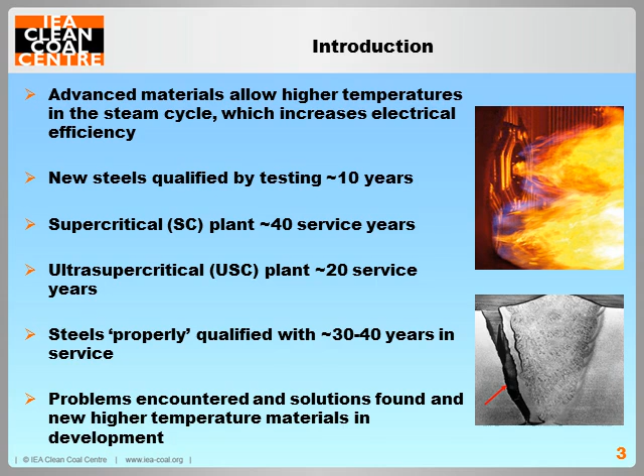There's also constant stress, which is caused by high pressures and high physical loads. This results in cracks on the inside of the material, and this is known as creep damage. There's also cyclic stresses, which is induced by fluctuating temperatures and pressures. This results in cracks on the outside of materials, and this is called fatigue damage.

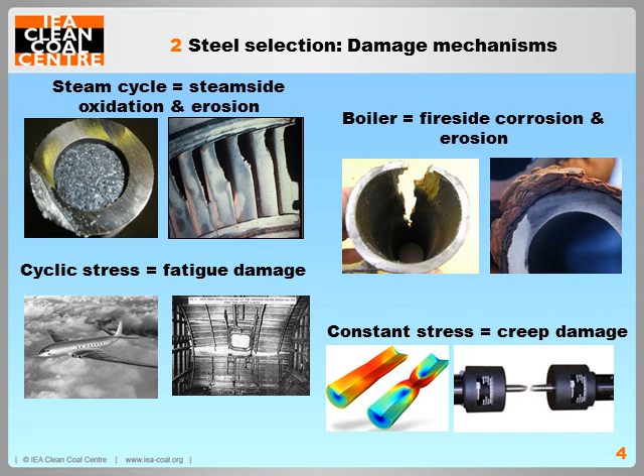So, steels are made up of loads of tiny crystals in the nanometer scale. These steels can be strengthened with three main techniques. The first is solid solution strengthening, which is where small amounts of different sized alloying elements are diffused into the metal to prevent movement.

The second is dislocation strengthening. This is where the material is deformed plastically at low temperature. This tangles the crystals in the material, which prolongs crystal life. And finally, there is precipitation strengthening. This is where the amount of alloying with at least two other elements is increased so that they create a second phase known as precipitates. These precipitates prevent the movement and recovery of crystals.

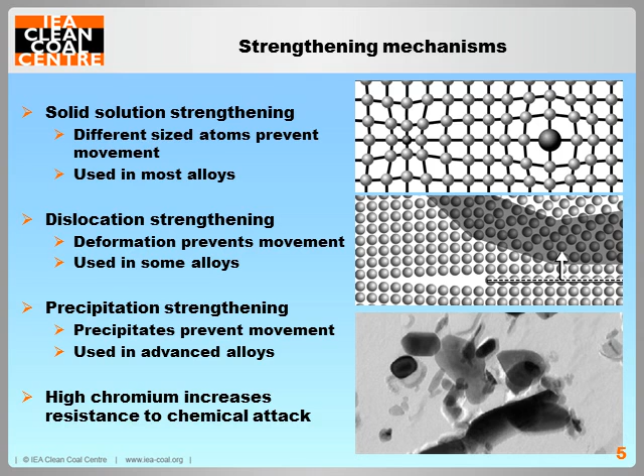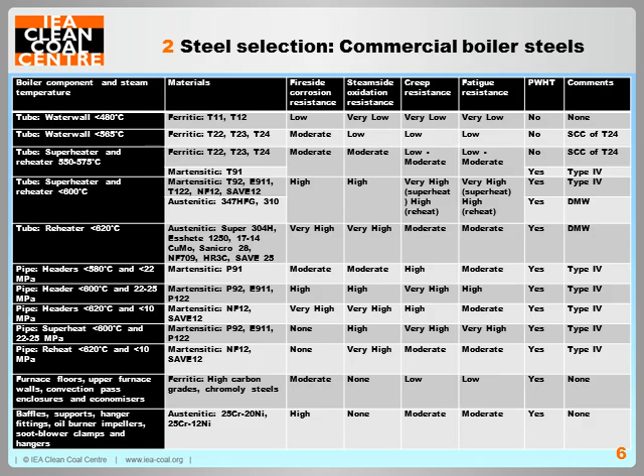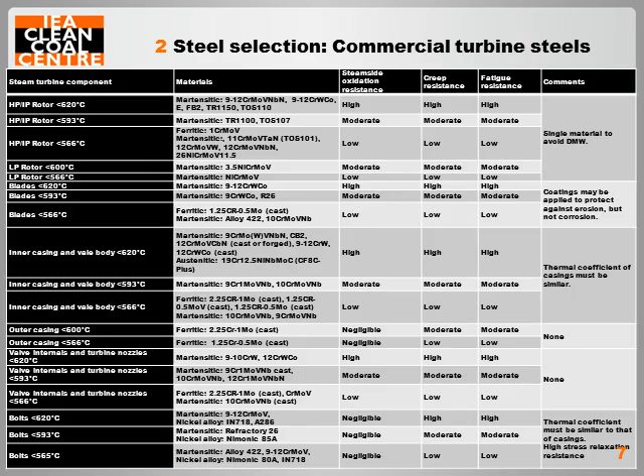This is the same table for the steam turbine component. I'm not expecting you to remember these tables. I've put them here purely to demonstrate the complexity involved in power plant materials. They are in the report for analysis.

So, ferritic steels, they have a low amount of alloying and are strengthened with solid solution strengthening and dislocation strengthening. Ferritic steels are easy to manufacture and they have a good performance all round up to 565 degrees Celsius, where they are then limited by steam side oxidation. They are the only steel that does not require expensive and time-consuming post-weld heat treatment.

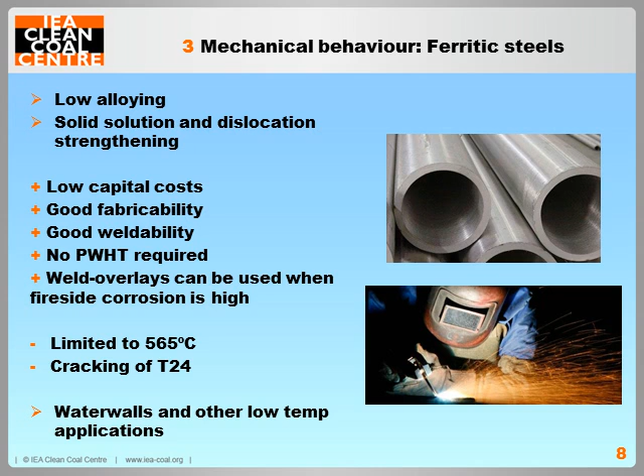Ferritic steels made up most of the components in subcritical pulverised coal-fired power plant, and the chrome alloy ferritic steels such as T22 are used in water walls and other low-temperature applications in supercritical pulverised coal-fired power plant. The installation of low-NOx burners in boilers has caused excessive corrosion of ferritic steels near the burners due to differences in combustion stoichiometry. This problem has been solved with protective high chromium weld overlays.

T24 is a new ferritic steel developed in Europe for ultra-supercritical power plant. Shortly after first commissioning in 2010, multiple cracks developed in T24. Evaluation found the cracking mechanism to be stress corrosion cracking. Preventative measures such as additional heat treatment during the welding procedure, adjusted water chemistry, adaptive chemical cleaning process and startup procedure were introduced in 2011, and to date no stress corrosion cracking has been detected.

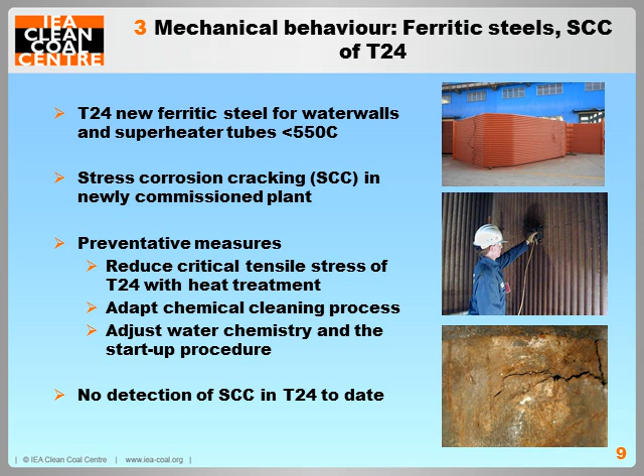Martensitic steels allowed progression to supercritical steam conditions. High alloying of chromium, molybdenum, nitrogen, niobium, vanadium, and others achieve a significant amount of precipitation strengthening. Generally, the 9 to 12% chromium martensitic steels have high creep and fatigue resistance, a low coefficient of thermal expansion, a high thermal conductivity, and good fabricability.

9 to 12% chromium martensitic steels can operate up to 600 degrees Celsius at high pressures of up to 25 megapascals, but they are limited by the resistance to steam side oxidation. 11 to 12% chromium martensitic steels can operate up to 620 degrees Celsius at low pressures of less than 10 megapascals, but are limited by their strength.

Martensitic steels do, however, require expensive and time-consuming post-weld heat treatment. They suffer from long-term weakening mechanisms and they are susceptible to cracking.

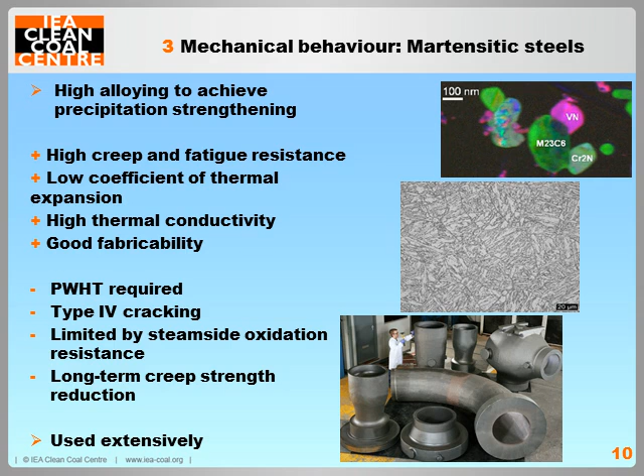Evaluation has shown the cause to be insufficient alloying or incorrect temperature profiles during the fabrication of the parent material, or insufficient alloying or incorrect temperature profiles of the weld material and the heat treatment procedures during the welding procedure.

New components have reduced the risk of type 4 cracking through component design, which minimises stress in the weld, and so that the welding procedure and post-weld heat treatment procedures are easier to carry out correctly. Also, it has to be ensured that the parent material has the correct amount of alloying and is fabricated correctly.

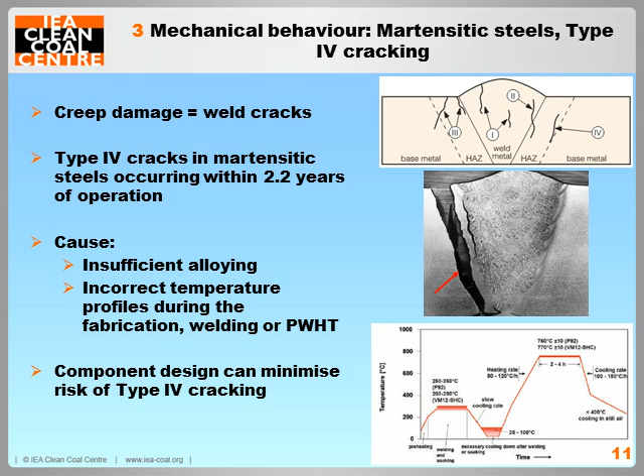So martensitic steels suffer from long-term weakening mechanisms. With all chromium martensitic steels with 9 to 12% chromium, the tungsten and molybdenum will precipitate out as large and coarse Laves phase, which consume all the small strengthening precipitates. Due to Laves phase weakening, P92 has been found to have long-term creep strength not much greater than P91.

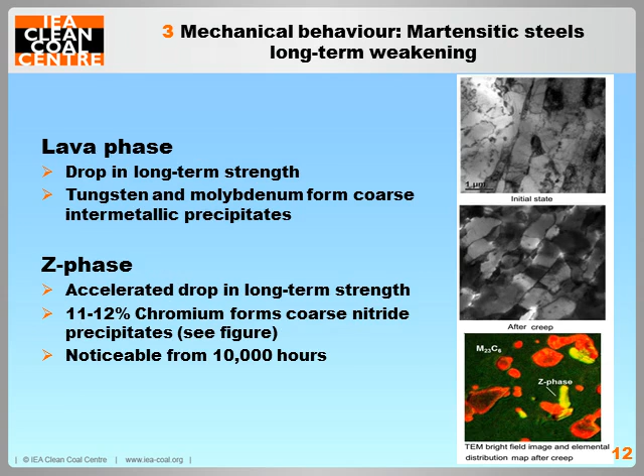Higher chromium martensitic steels with 11 to 12% chromium have an accelerated drop in long-term creep resistance, which is more than what can be explained by Laves phase alone. The increased chromium levels cause precipitation of coarse nitrides known as Z phase. So the combination of Laves phase and Z phase means that higher chromium martensitic steels are weaker than lower chromium martensitic steels.

Cyclic operation has resulted in higher fatigue damage of high temperature components, but also creep fatigue damage. Creep fatigue damage is where creep damage and fatigue damage interact synergistically, which can result in failure sooner than either creep or fatigue damage alone. Creep fatigue damage has been a significant cause of failures in T91. It is important to note that not all material codes currently assess creep fatigue damage.

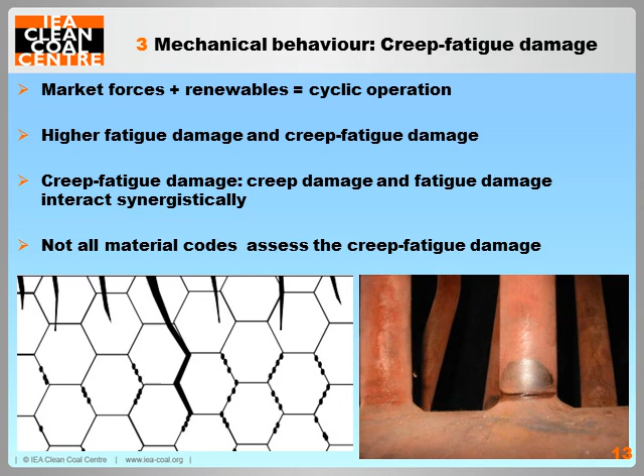Austenitic steels are used in superheaters and reheaters of ultra-supercritical power plant. They're seen every day as stainless steels. High alloying with elements such as chromium and nickel achieve high solid solution strengthening and high precipitation strengthening. They have excellent performance at around 665 degrees Celsius, but they have a high coefficient of thermal expansion, which results in cracking when used in thick section components. Austenitic steels are therefore limited to thin section components.

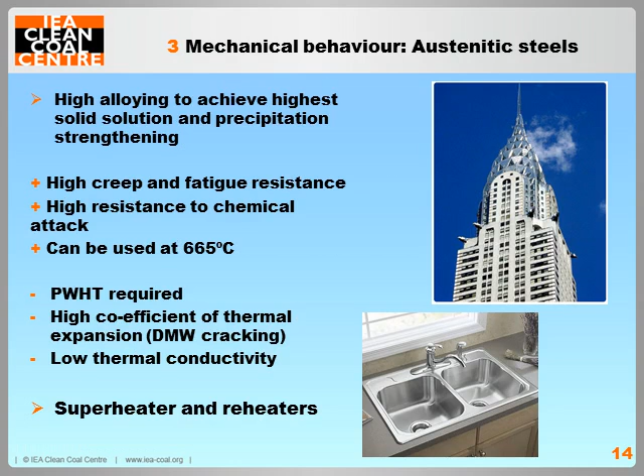Dissimilar metal welds are welds between different types of materials. There is a high risk of cracking at these welds due to differences in material properties. One issue is different carbon concentrations cause carbon to diffuse from areas of high to low concentration, altering material properties such that strength decreases. They also expand at different rates, and localized oxidation forms, which is an ideal place for crack initiation. So cyclic operation of older plants results in failure of dissimilar metal welds.

New components have reduced the risk of dissimilar metal weld cracks through thermal coefficient matching and component design to minimize the stress on the weld.

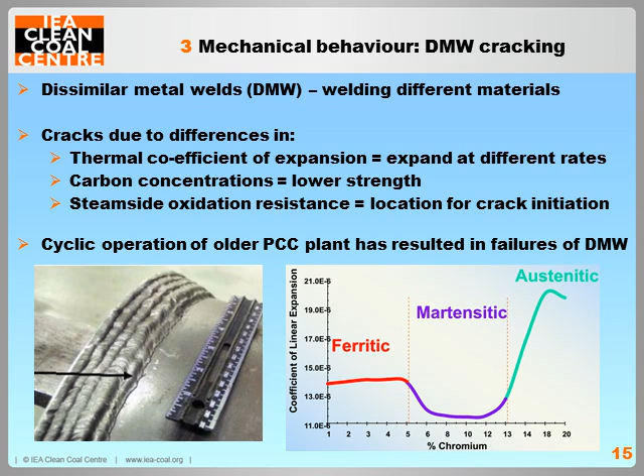Excessive slagging and fouling will increase creep damage as well as reduce boiler performance. Soot blowers use compressed air, steam, or water to knock off deposits. New intelligent soot blowers are retractable, can vary the injection pressure, and use heat transfers to determine when cleaning is required. This combination allows for maximum cleaning, minimum resource usage, and minimum material damage.

Typical payback periods for some plants can be less than one year, and this online cleaning technique can also eliminate the need for offline boiler cleaning for up to 20 years.

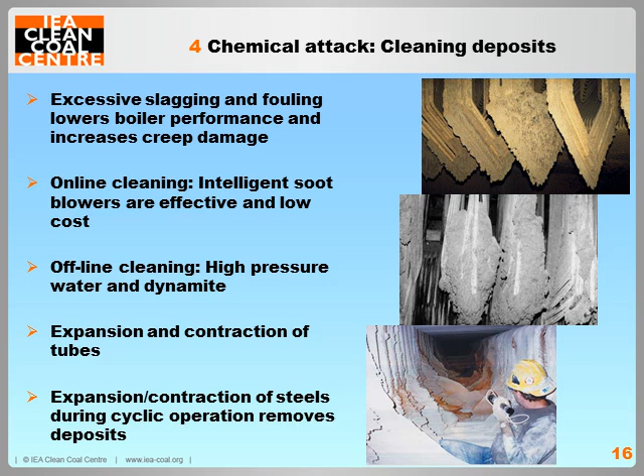An unforeseen advantage of cyclic operation is the fact that cold starts expand boiler tubes by up to half a metre. This can effectively dislodge the deposits, which again reduces the need for offline cleaning.

Feed water for the steam cycle can be treated in two main ways: firstly, deoxygenated feed water, and secondly, oxygenated feed water. Deoxygenated feed water results in no steam side oxidation, but the treatment method can dissolve iron in some situations. This is known as flow accelerated corrosion and causes a thinning of the pipes. Flow accelerated corrosion has resulted in numerous failures and fatalities historically. Despite this, deoxygenated feed water is still used in over 70% of fossil fuel power plants today.

The alternative is oxygenated feed water treatment, which creates a protective oxide layer on the inside of the material surface to prevent further steam side oxidation and flow accelerated corrosion. Another way to protect against flow accelerated corrosion is with the use of higher chromium ferritic steels.

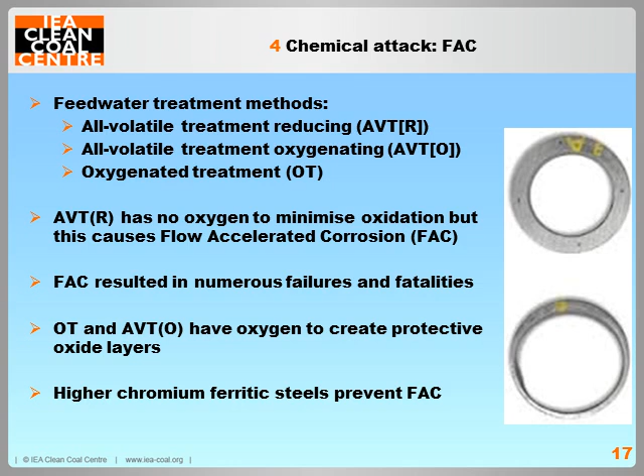It can be economically favourable to repair or replace components before failure, which could lead to catastrophic failure. To do this, the steel lifetime accounting for cyclic operation is required. This corrected steel lifetime can be accurately measured with modern software packages and material examination tools. This technique is known as condition monitoring.

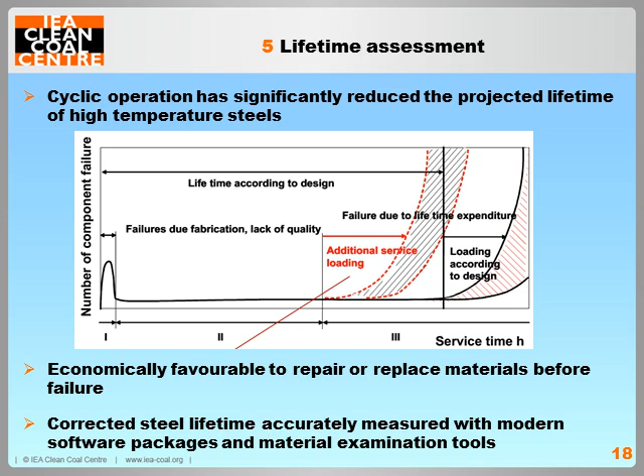Preventative maintenance strategies integrate information from process measurements and condition monitoring, online and offline, for multiple components, and consolidate them into a single computer program. This is known as a computerized maintenance management system, or CMMS. This can give a quick overview of the entire plant condition, providing risk and cost information in order to make a proactive and economically favourable decision.

One utility in the USA established CMMS across its 27 oil and gas-fired units. The results were 30% fewer forced outages, a 7% increase in peak reliability, and maintenance costs reduced within a few months.

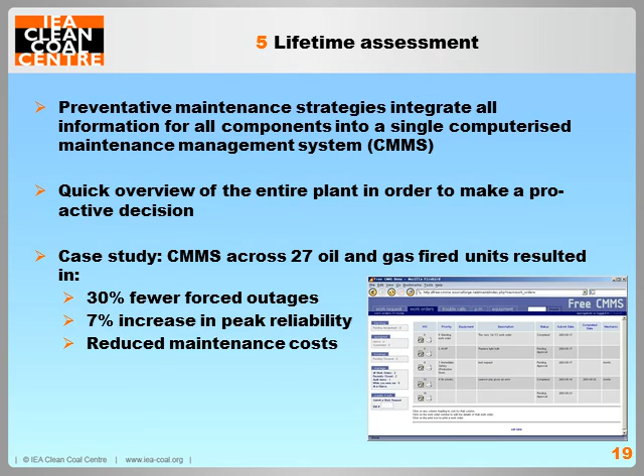The orange bars illustrate the highest steam temperatures achievable for commercial steels in major steam cycle components in modern ultra-supercritical plants. If steels can be developed for thick section components at 650 degrees Celsius, as shown by the purple bars, then ultra-supercritical power plants could operate at 650 superheat and 650 reheat temperatures, with a rise in net electrical efficiency of roughly 1 to 3% depending.

Additionally, stronger steels have thinner component walls. Thinner component walls are less sensitive to fatigue damage, which makes them more suitable for cyclic operation.

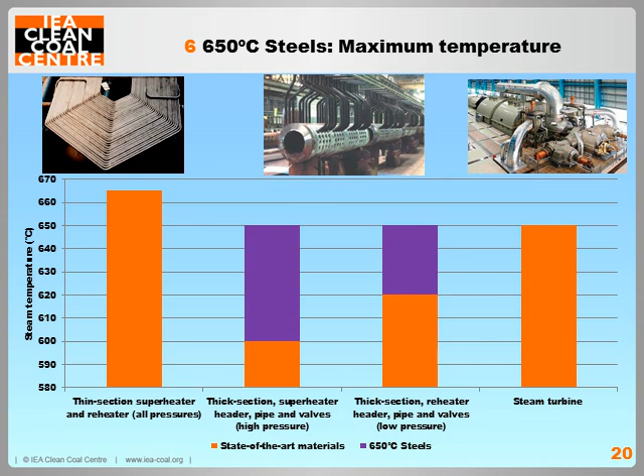Improving the long-term creep resistance of high chromium Martensitic steels, such as 12% chromium Martensitic steels, is a promising route for developing a 650 degrees Celsius steel, as they have inherently higher resistance to steam side oxidation due to the higher chromium levels. An interesting strengthening concept is to promote the formation of small Laves phase and Z phase precipitates during the fabrication of the parent material, thus turning the weakening mechanism found in existing Martensitic steels into a strengthening mechanism.

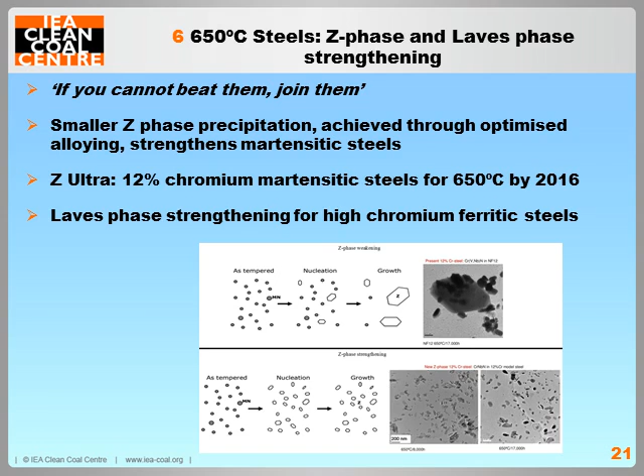Another interesting concept is sub-grain strengthening, where the precipitation itself is strengthened. Short-term results from projects in Japan and Europe have shown that sub-grain strengthened 12% chromium Martensitic steels are stronger than commercial state-of-the-art P92 by up to 55%.

New AFA Austenitic steels have a low coefficient of thermal expansion, which would allow them to be used in thick section components. They are being developed for use at 660 degrees Celsius.

Coatings for Martensitic steels are also in development. This would allow the use of existing, cheaper parent materials, which are coated to use them at higher temperatures. Coatings are yet to prove effective, and boiler manufacturers have historically avoided them.

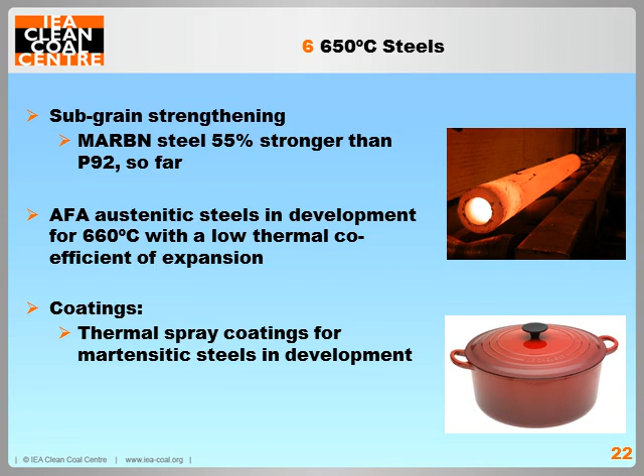So to conclude, ferritic steels are well proven and seem to have reached their limits. Martensitic steels are heavily used; problems have been found and solutions have been developed. Austenitic steels have performed well, but they are limited to thin section applications.

Operating power plant beyond their design criteria, such as severe cyclic operation, could result in failure, which could be catastrophic failure. Consequently, new methods can accurately estimate when failures may occur, so preventative action can be taken to minimise financial losses.

650 steels could be commercially available in the late 2020s for net electrical efficiencies reaching 50% on an LHV basis, in some cases.

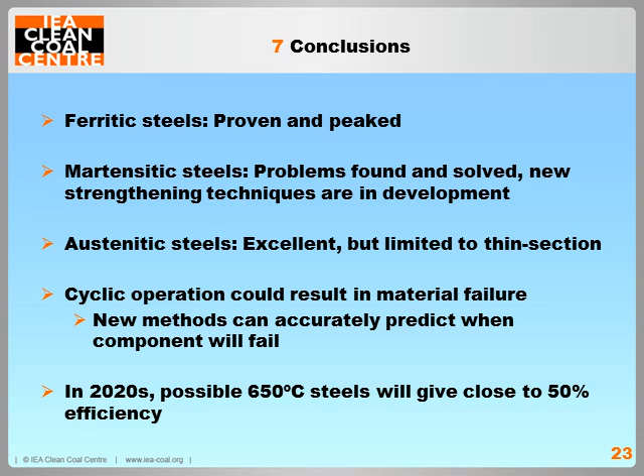Whilst I'm on the subject of high temperature materials, the next IEA Clean Coal Centre workshop on advanced ultra-supercritical coal-fired power plant, where nickel alloys are used in the highest temperature sections to reach 700 degrees Celsius maximum temperature, will be on the 14th and 15th of October this year, hosted by CSM in Rome.

The workshop will consist of 1.5 days of presentations and a half day site visit of the CSM facilities, and also there will be a conference dinner in Rome.

This workshop will bring together international experts to assess the present state of AUSC technology and provide a valuable networking opportunity. The first workshop was held in September 2012 and was hosted by EVN in Vienna.